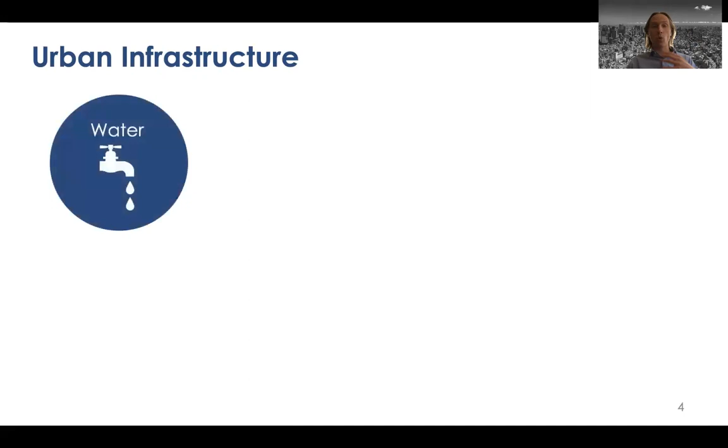I'm not focusing on one unique infrastructure system, but I look at all of them. So I look at water systems, wastewater systems, transport systems, electricity systems, gas systems, solid waste management systems, and even telecommunication. And I try to look at all of them, their interdependencies, their interrelationships, within the context of sustainability and resilience. So what does it mean for us?

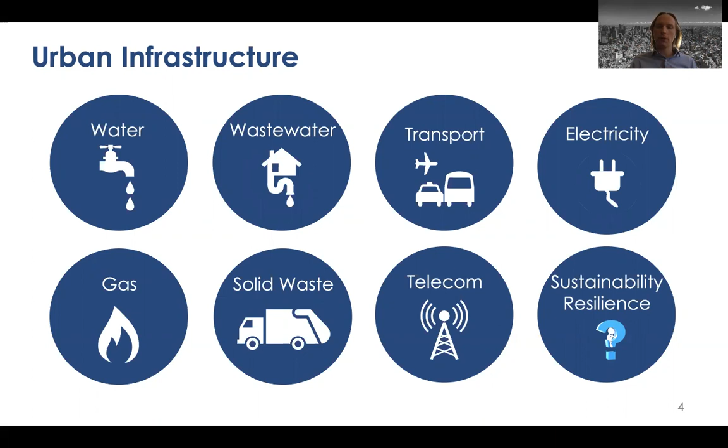We're going to start with sustainability, then we're going to go to resilience, and then we'll have a small case study at the very end to illustrate some of the points that we're learning in sustainability and resilience. So sustainability, I like that common definition. That's the definition that's probably the most commonly accepted in the world. Some people don't like it. I actually like it a lot.

Sustainable development is development that meets the needs of the present without compromising the ability of future generations to meet their own needs. That's from the World Commission on Environment and Development, better known as the Brundtland Report, in 1987. I like it a lot because I think it makes it sort of easy. Sustainability is essentially the ability to sustain an activity forever. If we do something and we can do it forever, then it's sustainable. If we can't do it forever, then it's not sustainable.

Another way to think about it is to give it more of an economics twist. We have needs and we're trying to meet those needs. Needs are a consumption, so we're trying to consume something, and to meet those needs, we need to produce something to supply that demand, that consumption. So essentially we have production and consumption, and what we want is for the production to always be larger than the consumption, always. So it's not only about production minus consumption being greater than zero.

For it to always be greater than the consumption, instead of looking at the production itself, we look at the rate of production and the rate of consumption. So one of the ways that we can turn this definition of sustainability into an equation is dP/dt minus dC/dt is greater than or equal to zero. So no matter what happens, the rate of production is always going to be greater than the rate of consumption.

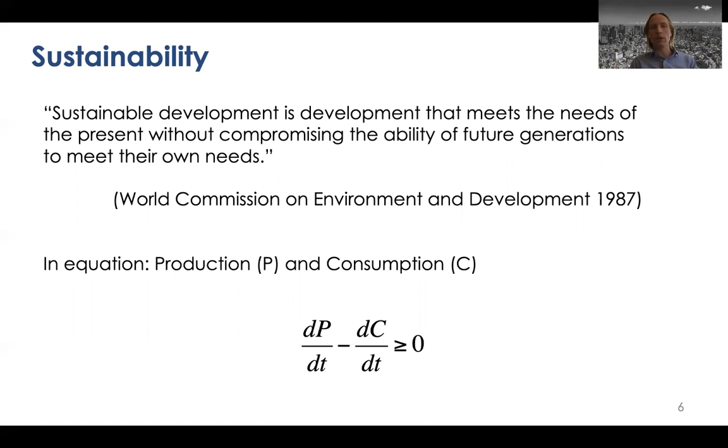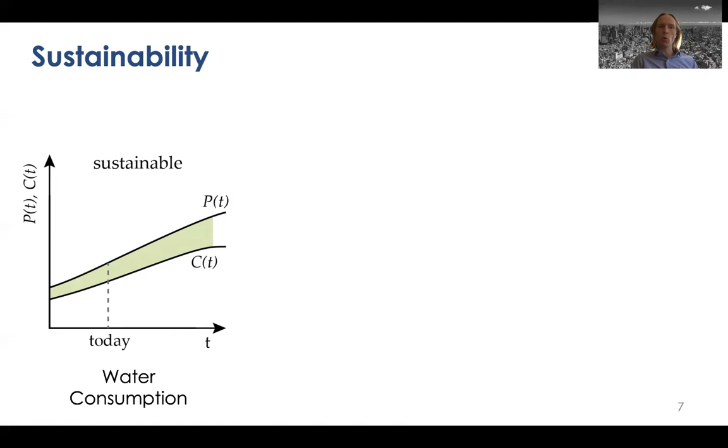I live in Chicago. We have Lake Michigan next to Chicago. Lake Michigan is one of the biggest lakes in the world. We're fine with water. The population could double, could triple, we would still have enough water. So we are in a sustainable state when it comes to water consumption, at least in Chicago.

Now there are cases where we're sort of in between, where right now the production is higher than the consumption, but the rate of production is lower than the rate of consumption. And so we're in a tolerable state where we're okay, we're meeting all our needs, but something is going to be different in the future. A good example of that is solid waste management.

We're generating waste, we're collecting that waste, we're trying to put it in some dumps, in some landfills, and it could be okay. We have a lot of space, but at some point, that rate of consumption or that rate of generation of waste is going to be so great that we're not going to have enough landfills. So that's why reusing, recycling, repurposing is something that we must all do. That's a good example again for waste management of the tolerable scenario.

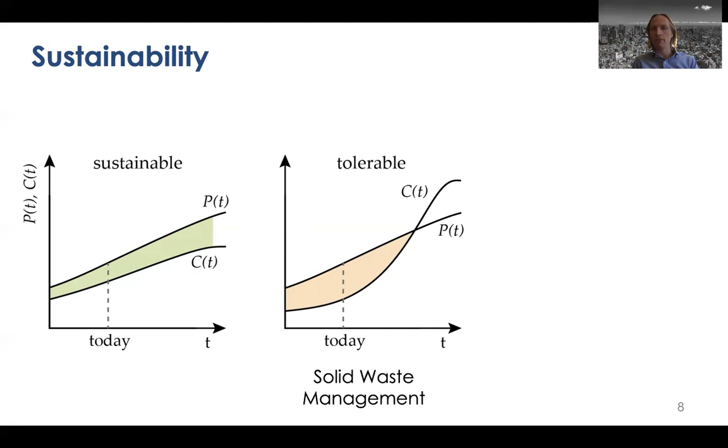And then we have the unsustainable scenario where the rate of production is just lower than the rate of consumption. A great example is transportation. Twice a day during rush hour, we have a certain capacity, and that capacity gets exceeded by the consumption. And that's why we're stuck in traffic.

I like Vietnam because Vietnam is a little bit different, because that rate of production, actually, that capacity changes during the day, because you have all those motorcycles that just drive on the road during the day, and during rush hour, they also go on the sidewalks. So it's always fun or confusing or cumbersome to try to walk around in Hanoi or in many cities in Vietnam during the rush hour, because all of a sudden the sidewalks get attacked by motorcycles. At least that's my experience when I was in Hanoi during my sabbatical.

So these are three. So again, I like to think about them: sustainable, tolerable, unsustainable. Where are we now, at least from a conceptual perspective, when it comes to infrastructure?

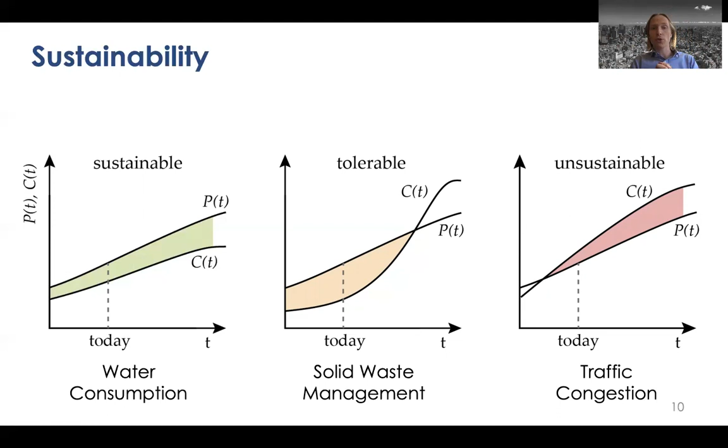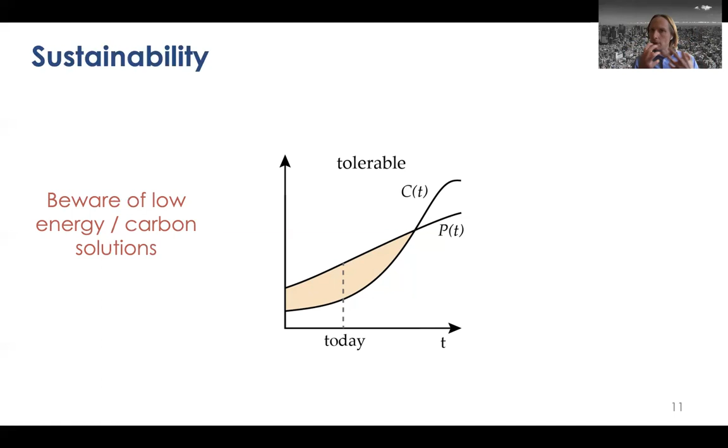The only one other thing I want to say is, we should beware of low energy, low carbon solutions. Low energy does not necessarily mean more sustainable. Not necessarily. Sometimes yes, sometimes no, because low energy might still mean that we're going to consume more, and the consumption grows, and at some point the production might still be lower than the consumption. So that's why instead of just going for low energy systems or low carbon systems, I like to think a bit differently and really think more in concepts of consumption and production.

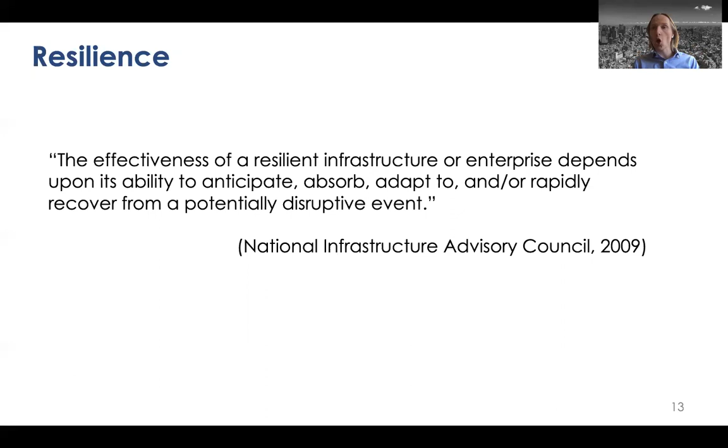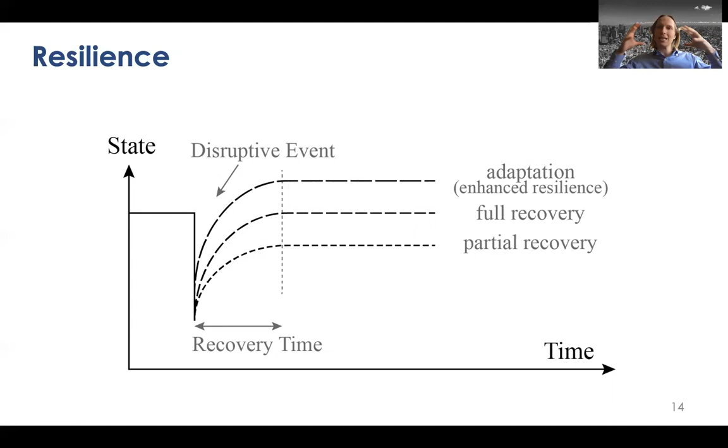One of the ways that it's normally illustrated is with this graph here, where we have time and the state, with some kind of an equilibrium at some point, and then there's a disruptive event. So there's a sudden drop in the state, and then depending on how fast we recover, whether it's a partial recovery, full recovery, or even if we can adapt and enhance the system, that's how we measure resilience. I don't like this because I think it applies great at some parts, at small parts of systems. When you think about the entire system, it's a bit more complicated than that.

In the 1980s, Charles Perrow wrote a book called Normal Accidents, and it defines a system as being composed of multiple subsystems that are composed of multiple units that are composed of multiple parts. And we've spent a lot of time looking at resilience at the unit and part level. So a part could be a valve, for example, in water distribution systems. A unit could be a pump, and a subsystem could be the entire pumping station. And then the system is the whole water distribution system.

So with units and parts, we're going to try to build redundancy, we're going to try to be robust, and it's working okay. But at the subsystem or especially system level, now we're running into a problem, because we can't be redundant in the system.

I mean, if you have a water distribution system, you're not going to have a separate parallel water distribution system in case something happens to the first one. So that mentality needs to change when we think at the system level. So redundancy is just not enough.

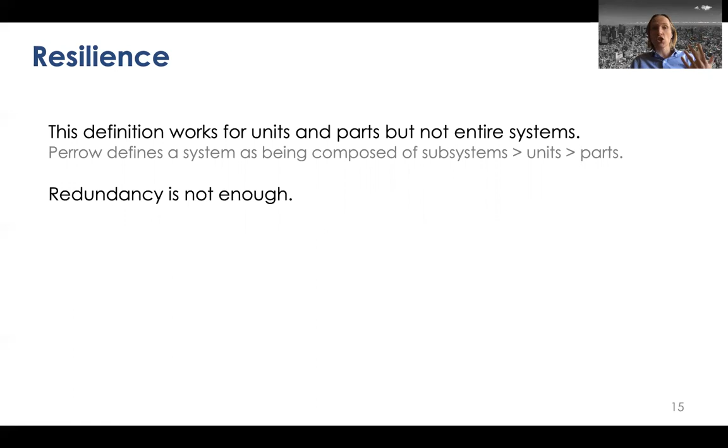The other thing is that the graph before really showed us that there was some kind of an equilibrium, but infrastructure systems are built over decades, centuries. So there's no equilibrium. We're not in a stationary state. Infrastructure systems are non-stationary. There's no equilibrium. So that mentality of trying to maintain certain operation really doesn't work in the longer term. So again, that's why I don't like it.

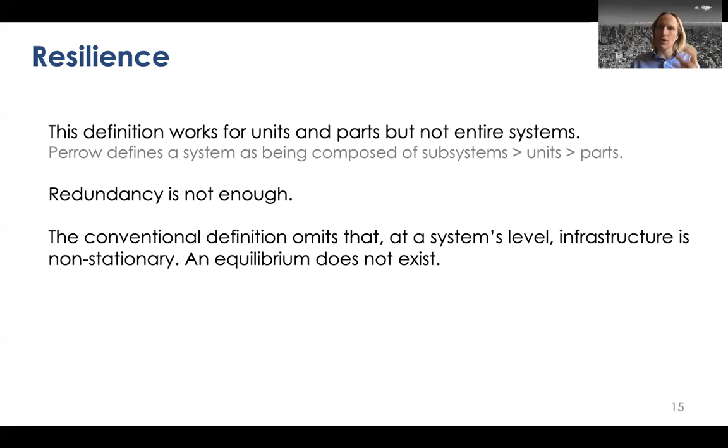And so when we scrap that notion of being stationary, then we think more about flexible, we think more about adapting. And I think it really gives us another idea of being resilient. The other thing is that we should really change our design practice from fail-safe to safe-to-fail. So fail-safe means that we're just going to do everything we can so that if something happens to a system, it's not going to fail. If there's a disruption, we're going to have redundancies, et cetera, so it doesn't fail.

Now we're going to try to change it by saying, you know what, there are unknown unknowns. That system could fail. There are some scenarios where, despite all the redundancy that we can build in, it could fail. And so what we want is, if it fails, we want it to fail in a safe manner. So again, different mentality.

And the last one I want to mention is a different perspective again: we've spent a lot of time focusing on infrastructure, and what we realize now is that we should really make infrastructure more flexible. So flexible is the key word, hard to operationalize, but what we want is to make it flexible. And we haven't really thought about the organizations that manage that infrastructure. But now we realize that those organizations are also rigid. They have rigid structures. And so whenever there's a disruption, or if we need to adapt, even over 5 years or 10 years, because they're so rigid, it's not working too well. We can't come up with nice solutions so that infrastructure is more resilient, again, just because of those organizations.

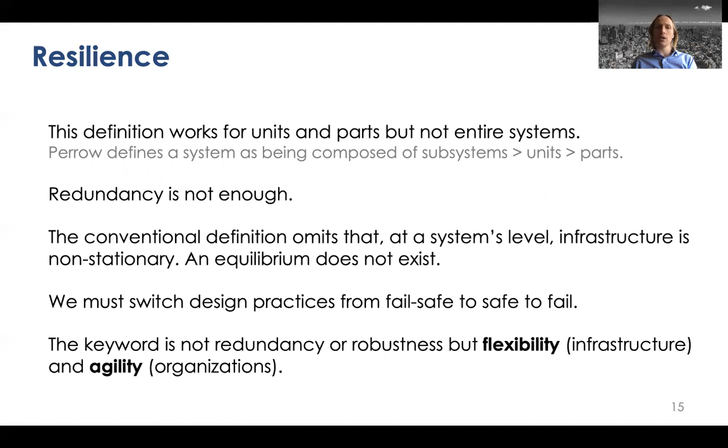So there's the term, I'm borrowing terms now from Mike Chester at Arizona State University, agile. So those organizations need to be more agile, so they adapt, so they change as the needs of the infrastructure change. So flexibility and agility in organizations.

The other thing I want to mention is that now we realize that for the longest time, we tried to optimize the system so it could be more resilient. So if there's something, we're optimizing everything. And now we really realize that optimization does not lead to more resilience, it leads to more vulnerability. Whenever you optimize a system, you can't include every single variable possible. So a lot of times what you're doing is you're actually building vulnerabilities, you're building bottlenecks, you're building places that are not as safe, where you don't have as many resources.

And so optimizing is really more rigid versus another term that's called satisficing. Satisficing is a portmanteau term between satisfy and suffice. It was created in the 1950s or 60s by Herbert Simon, one of the fathers of complexity science. And satisficing is different. So optimization is rigid, satisficing is more flexible. Satisficing is more about meeting a few criteria, a few thresholds. Satisficing is even more the way humans think.

So for example, let's say that you want to buy a new laptop. You might want to optimize your card and your this and your that and your size and your screen, so that you have everything optimized for what you do. But then you should realize that what you do actually evolves, plus the offer that you get when you go to a computer store, you don't have the perfect computer for you. For sure, you could build your own, but again, something might change.

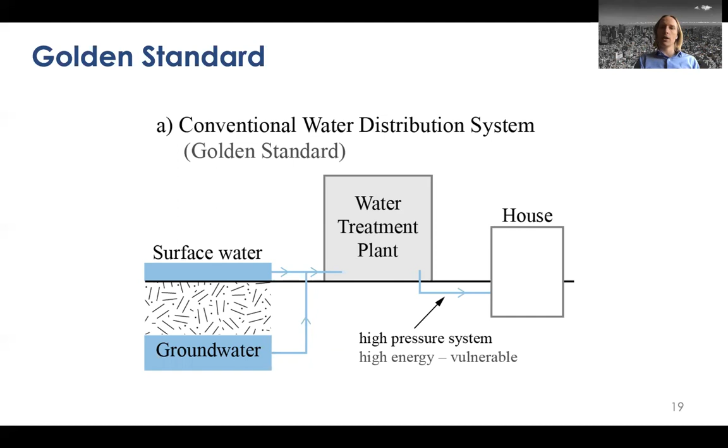And I was amazed when I was in Hanoi, because I thought that the water distribution system there was vastly superior to what we have in most high-income countries. I don't think Ho Chi Minh City is exactly the same, but it is the case in many countries, middle-income countries. It's pretty incredible the way it works.

So in Hanoi, what happened is that you had a water distribution system that could not provide for the entire city. So they would provide water to one district, and then another one, and then another one, every few hours or every few days. But houses needed water all the time. So what they did is they all put a water tank in their basement.

And that water tank is in the basement on purpose, so that water coming from the road is at a higher level than the basement tank. And so you always have water flowing in, even if there's very little pressure in the system.

So that basement tank is there, and then when the water is there, you pump it up to a water tank on the roof. It's a smaller tank, but it's sitting there, just pumping water there whenever it needs to. The nice thing there is if you have a power outage for some reason, because it's at a higher elevation, you still have water all throughout your house.

And then at the tap, if you want clean water, the water might be in those tanks for some days, some pathogens might have been introduced, maybe there's a lower pressure in the system. In Hanoi, I think we're at about 10-meter pressure in the system. It can be lower really because everyone has a basement tank. So the minimum is not so much what we need for the buildings, but it's the fire safety minimum.

Conclusion: sustainability, resilience. We still don't have a definition. I don't think we should seek a definition, but we should challenge a little bit the status quo, what we think about it. So sustainability for me is really about being able to pursue an activity forever. Resilience is more than just redundancy or robustness. It's really about being flexible, both the physical infrastructure and the organization managing it.

The future of sustainable, resilient infrastructure really lies in creative solutions, such as the one that we saw in Hanoi.